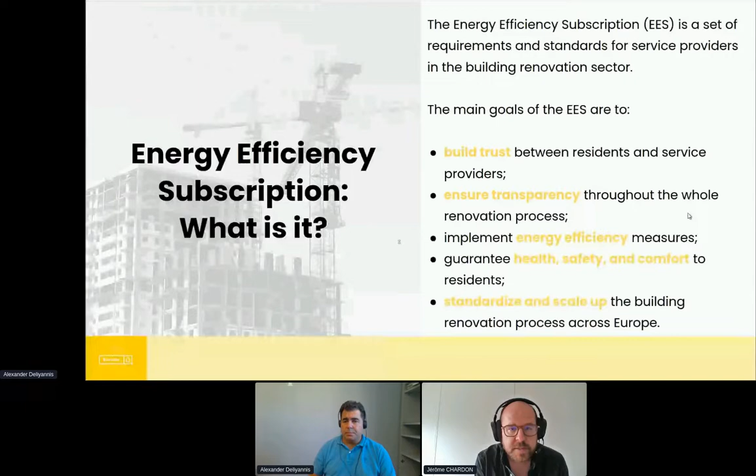Just go a bit deeper quickly about the general structure of our contract. We have some compulsory criteria, specifically about energy, and also how to choose our market operators. They have to provide the information regarding their qualifications, certifications, and experience through residential buildings renovation. And we have also a lot of other criteria.

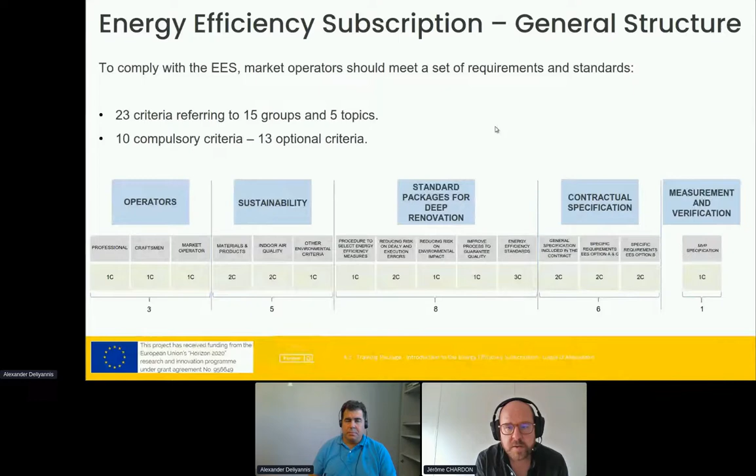Some of them are optional, about health, environment, and also if we go deeper in the IPMVP process. Next slide, please.

One other important thing is the way the finance is done through this contract, because we try to duplicate a financial scheme we have from our partner in Latvia. They use a financial vehicle called a BEEF, which provides a way to do some third-party financial scheme. And it is very important that the costs of the works are in fact paid all along the contract for maybe 10, 15, or 20 years. So it's not a huge amount of money to bring at the very beginning of the project, but during all the contract. So it is really a way to finance the project, which is much more acceptable for the owners.

I'd like to say that it brings guarantees for energy efficiency, and also it eases drastically the decision making process. So of course we're going to have the opportunity to go a bit deeper if you need some more explanations, because this kind of graph is not very clear the way it is just like that. Next slide.

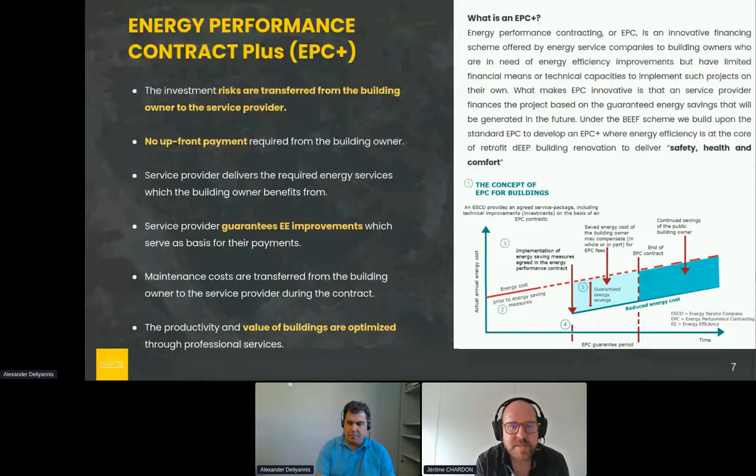Okay, that's it for me. I know it's a lot of data, and it requires a lot of clarification, so please ask.

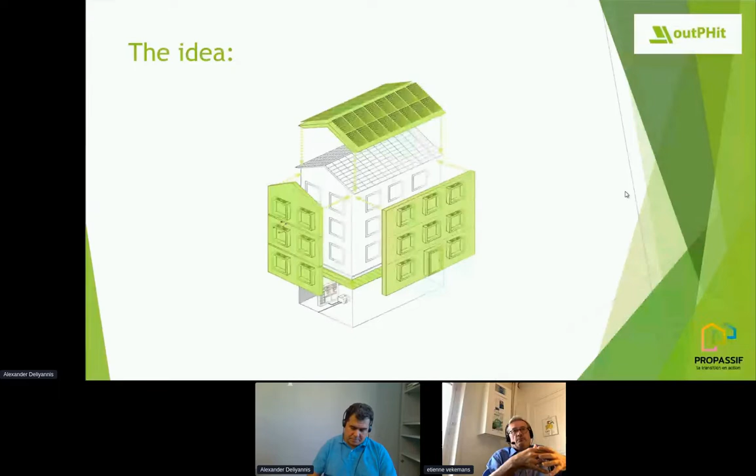Now you should be able to hear. The concept itself is basically simple. It's using prefabricated modules to isolate and to protect the old building, so that at the end of the retrofit, it reduces the consumption for the inhabitants, and it reduces the CO2, the gas.

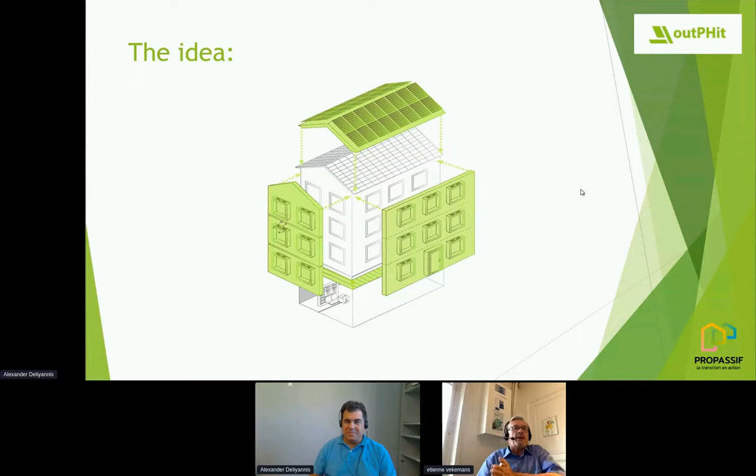Well, the simple idea is actually much more complicated in the facts. So maybe if you could change the slide.

Our part in this outPHit project is to follow different case studies, as well as observer projects. The case studies are small projects because they have to be renovated within the three-year time frame of outPHit, and the observer projects are bigger ones. We have taken 2 of those observer projects to show you what can be done with EnerPHit renovation. If you want to see different case studies, here are a few pictures from Greece, Austria, France, Spain, Bulgaria, and the Netherlands.

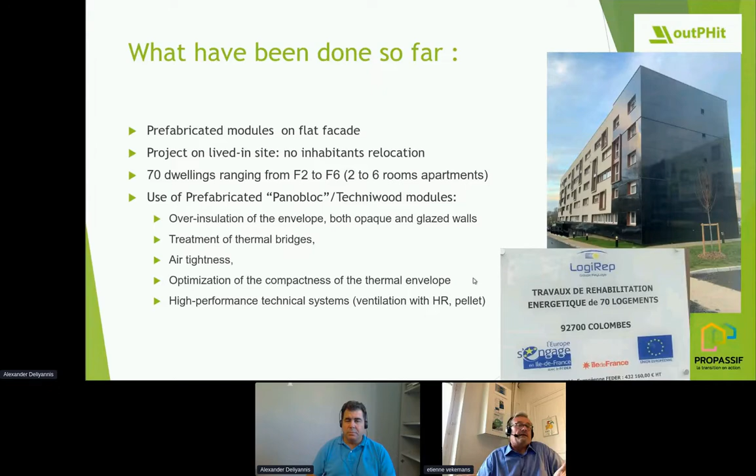The use of prefabricated modules was also an opportunity to work on the airtightness of the building, an opportunity to work on the thermal bridges, and an opportunity to optimize the compactness of the thermal envelope and use a high performance system in order to have, at the end, very low consumption and high comfort.

We have seen on the last slide that one of the advantages of this building was the very flat facade. It's a point in making deep renovation. If you start with a flat facade, which was actually the architectural way to build buildings in the 70s, it's one of the easiest architectural standards for making deep renovation.

There was, among Logirep, which is the social landlord, a very strong pool of experts around FH Construction and Indigo, which is the engineer bureau working on the project. So there was a lot of know-how, and it was necessary to make the plans before the start of construction. Maybe we can move to the next step.

Here you've got an aerial view of the buildings. Actually, it's 3 buildings: building A of 2,500 square meters, building B of 1,500 square meters, and building C of about 1,700 square meters.

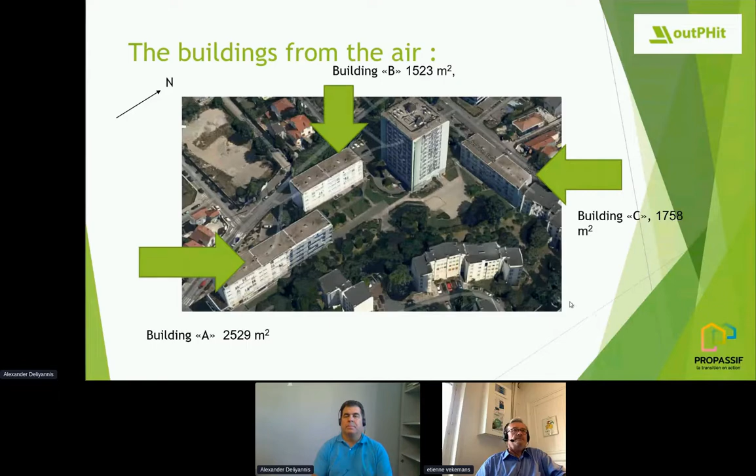If you go into the detail of the retrofit, you see here the layout of the prefabricated modules, which were prepared in a workshop by the firm Techniwood, and it's called Panobloc. It's actually timber frame modules. There were lots of plans in order to be sure that what would be realized in the workshop could be set up on site without any delay, which worked out fine. This was a real success of this renovation.

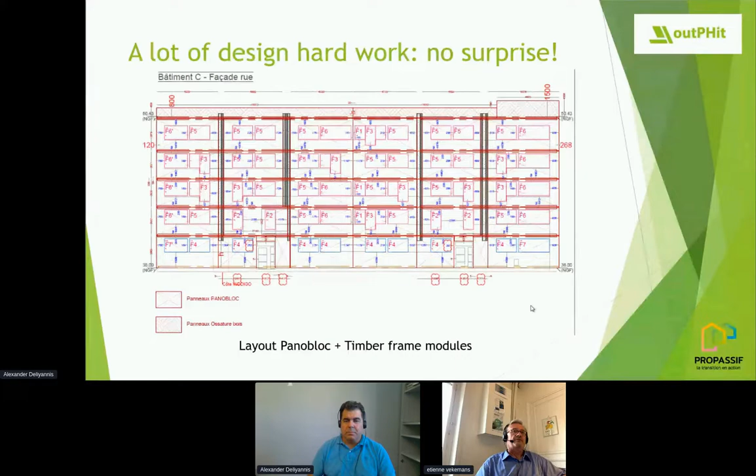Well, you see here the Panobloc module, where the module has a U value of 0.121. The only problem is maybe the thickness, but if you work with the buildings we were working with, this thickness of the modules doesn't play any disadvantage actually.

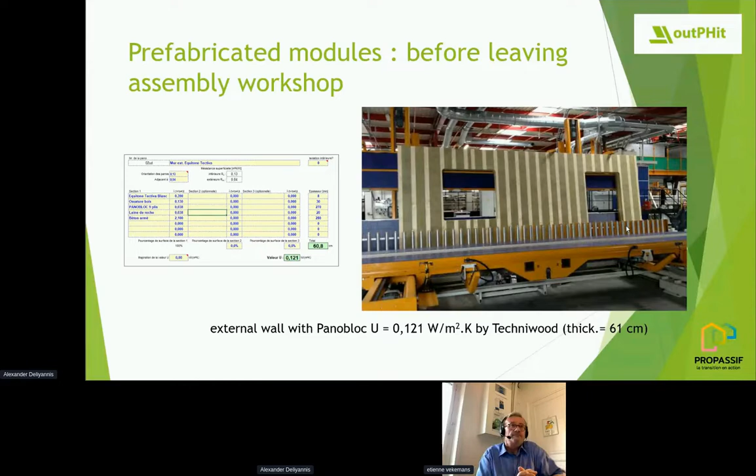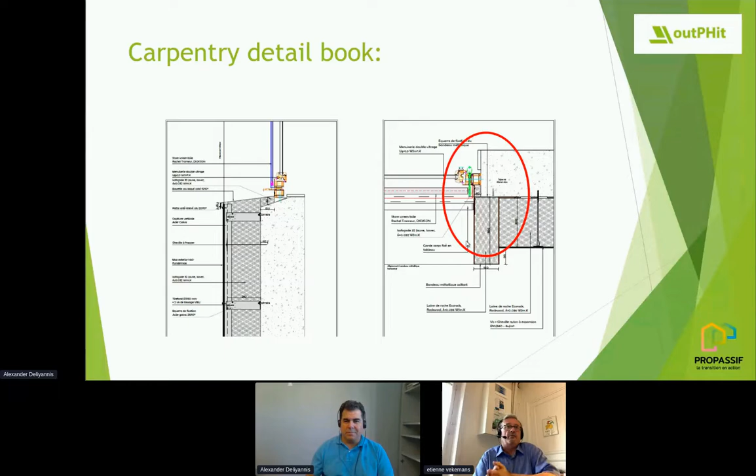Here you see the carpentry detail book. There were parts working with existing elements and parts working with Panobloc modules. Windows play a very important role in those renovations, because windows are the least efficient part of existing buildings. So the renovation of windows is a very important part of the conception and design before designing the renovation. A lot of work was done between the start of the project in 2013 and the end of the project in 2022.

Here you see another very important part: in those airtight buildings, the ventilation of the apartments. This is a view from the air of the ventilation design on the roof of building C. The blue pipes bring the fresh air, and the red ones bring back the exhaust air, and in between you have the ventilation with heat recovery, which is an important and complicated matter in renovation. But with the help of prefabricated modules, we can hide most of the ventilation in the prefabricated modules.

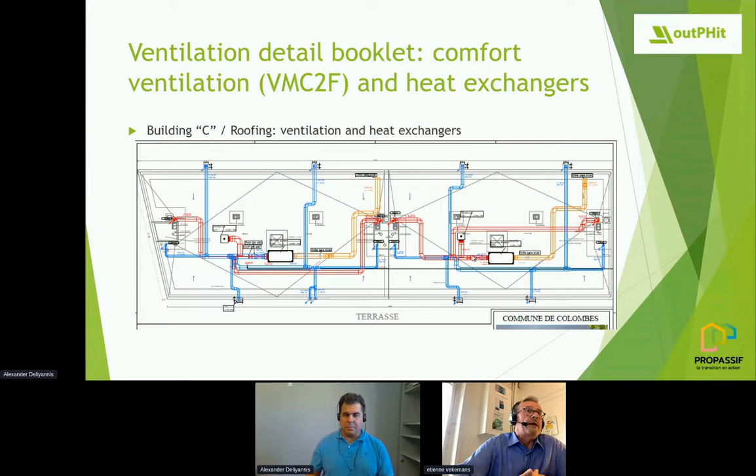This is the result at the end of the retrofit. We are still waiting for definite costs linked with this project, but what we know already is that the prefabricated modules cost €600 per square meter. The retrofitted project saved about 200 tons of CO2 per year, because it moved from gas to pellet heating, and on a 50 year basis, the retrofit project saves actually 10,000 tons of CO2.

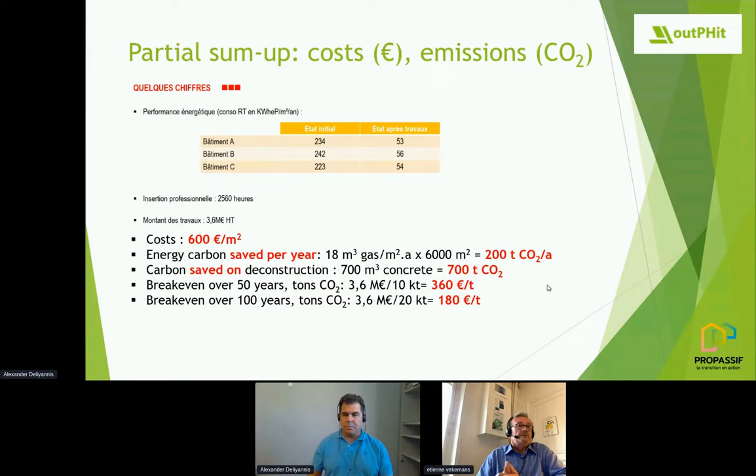So we can say nowadays that this kind of renovation brings a real, impressive advantage for the inhabitants, that's for sure, but also for the whole community, because it reduces the amount of gas emissions, the emission of CO2.

And this is the last slide of my presentation, and I'm waiting for questions if you have any. Thanks for your attention.

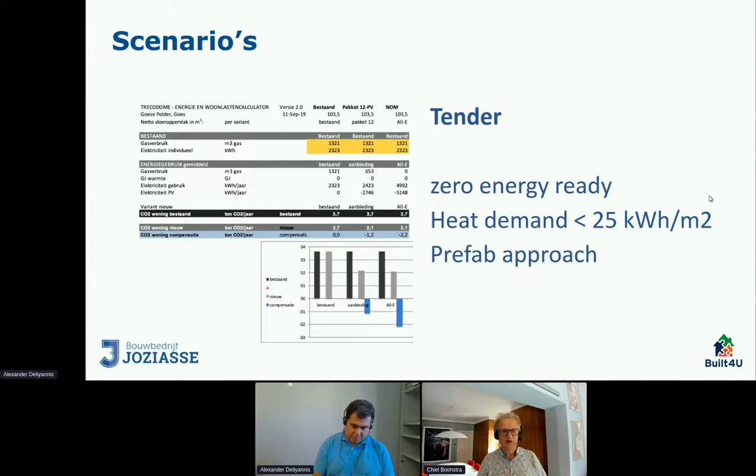We were really proud that during construction, every blower door test we made met our requirements, so we didn't have to repeat the process, which is pretty typical in projects where you do blower door tests - you find failures and have to correct them, but we didn't have to do that here. The tender was asking for zero energy ready homes with a heat demand less than 25 kilowatt hours per square meter, and it was asking for a prefab approach.

This is how the prefab approach worked with these row houses: prefabricated facade elements including everything - insulation, triple glazed windows, summer night ventilation openings - a prefabricated roof with solar PV included, and in the loft of the house, heat recovery ventilation. This all together resulted in the low energy demand and healthy homes that we were aiming for.

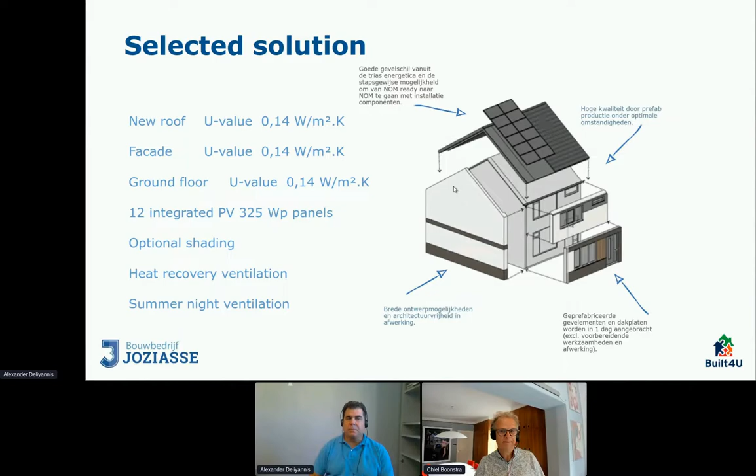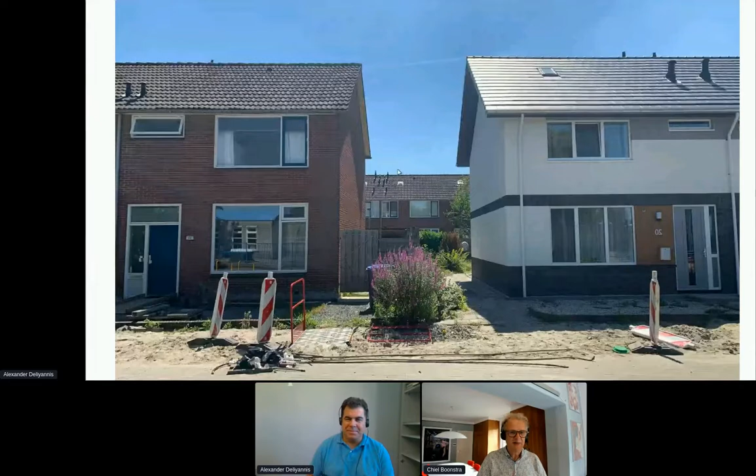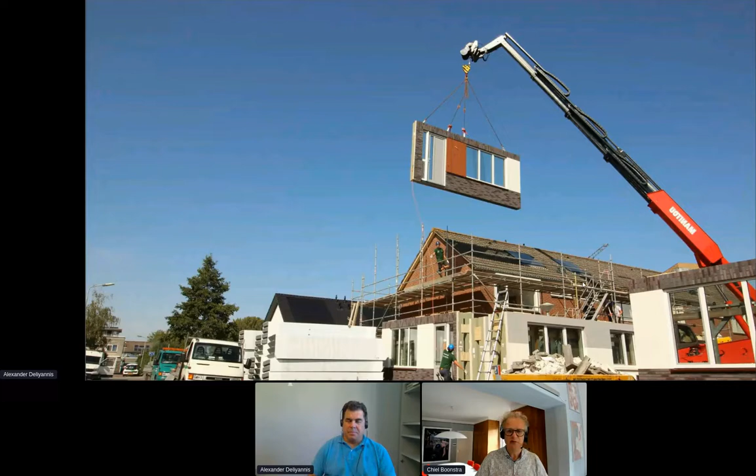Here you see how an element is craned around the building. We did 4 houses in 1 week, and Friday was used to complete those 4 houses, then the next week the same series could start. Another flow of work came through the project to complete indoor works, like improving bathrooms and toilets, which was also part of the process.

Again, a before picture, and the next one is an after picture. Here you see how the buildings look much friendlier, a better appearance, and you see the well-integrated solar panels in the roof, which cover the full household electricity demand of those houses.

And we need only 20% of the natural gas that was used before. That means these people can withstand the current energy prices, and that they can still afford to live in a social housing project.

That is the strong message that we also need to convey in the Netherlands, where I have to say this kind of deep renovation is not yet common practice. So we need all European help and support to consider deep renovation as the solution to fight against fuel poverty, and also as the solution to fight climate change and to achieve a low CO2 performance of the buildings.

Next. Proven quality, as I said, a beautiful overview picture. This is part of a short movie we have where you can see how it's done. All of that will be made available to outPHit, but this is to give you a short snapshot of the project.

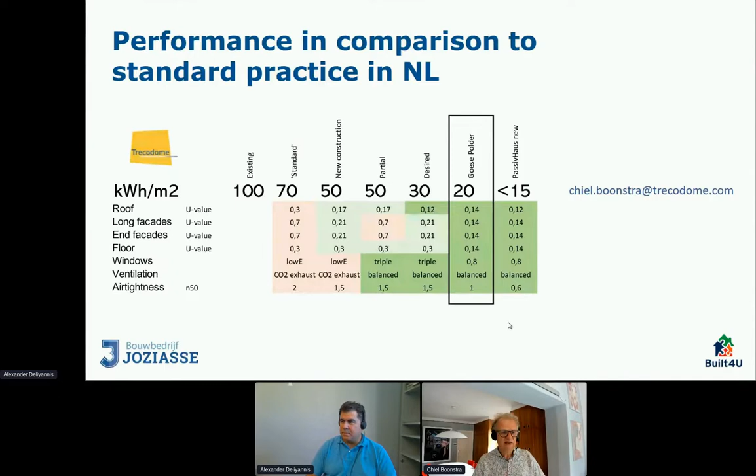This is why it's so important to convey the message that deep renovation can offer these solutions, which are even better than new building performances as they are being done in the Dutch market today. Thank you very much.

Thank you very much, Chiel. And you also covered some points which could be said in questions. Thank you very much for the points on energy poverty. That was very key indeed.

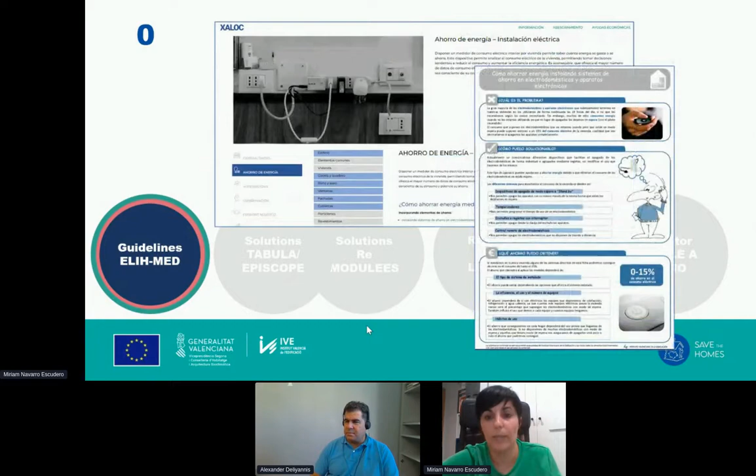Here we have different solutions taken from other projects to provide functionalities in each of the stops. For instance, we have an awareness campaign coming from the ELIH-MED project, or other tools coming from RE-MODULEES or other regional projects, in which we designed a co-design tool to decide solutions. I'm going quick. We also designed a register in the construction part, a register of construction companies to validate and demonstrate their quality and compliance for the users. And finally, we also have monitoring, which is something we are still working on. It's not already in place in the office.

The results so far: we have 21 citizen hubs implemented in the regions, 74 municipalities involved, and 9,000 visitors. Here we have the dashboard of indicators, which up to now is just focused on the visits we have. But we are working on quantifying the users who are renovating buildings after visiting the office, and also on evaluating the performance of the building after this renovation.

So that's all from my side. I will wait for your questions if you have any.

Thank you, thank you very much Miriam. I have to say that your speech was quite commendable.